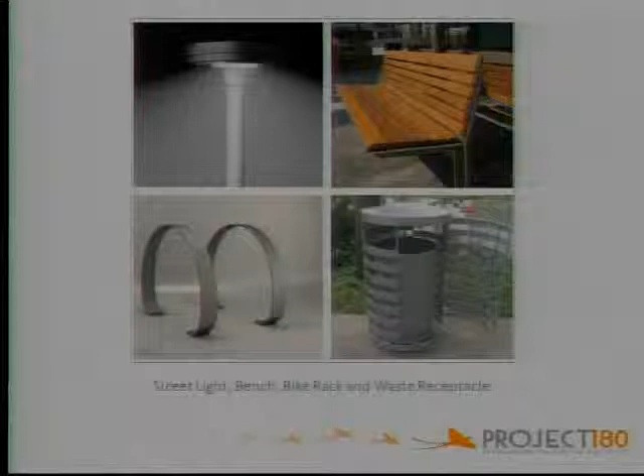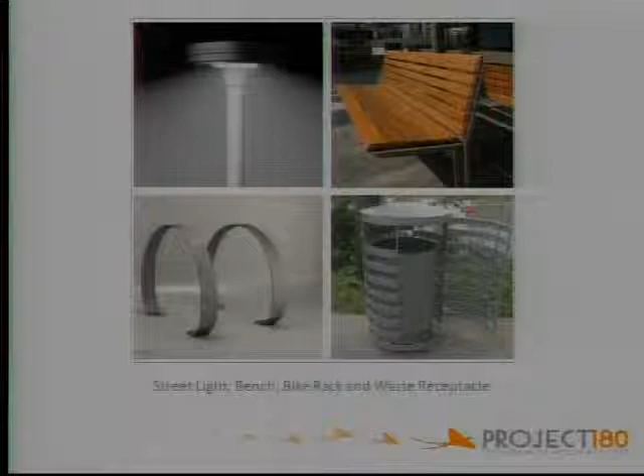This is a slide of some of those improvements, and a lot of these are being located throughout, so I think they're familiar to most of you. In the upper left we have some of the new lighting systems, the new benches, the new bike racks, which are the hooped items you see in the lower left-hand corner, and also the new trash receptacles and cans. Some of those have also been designated for recycling.

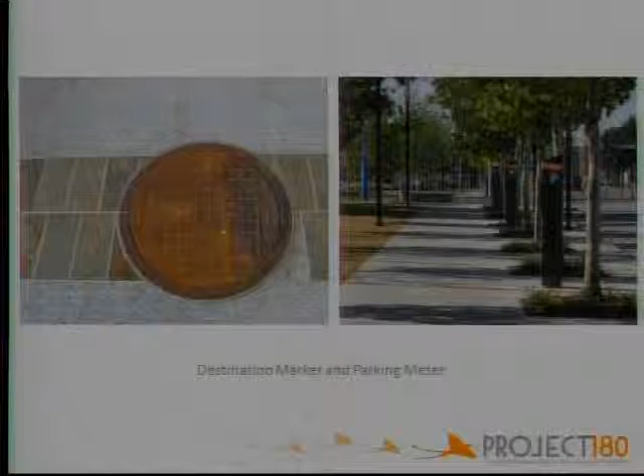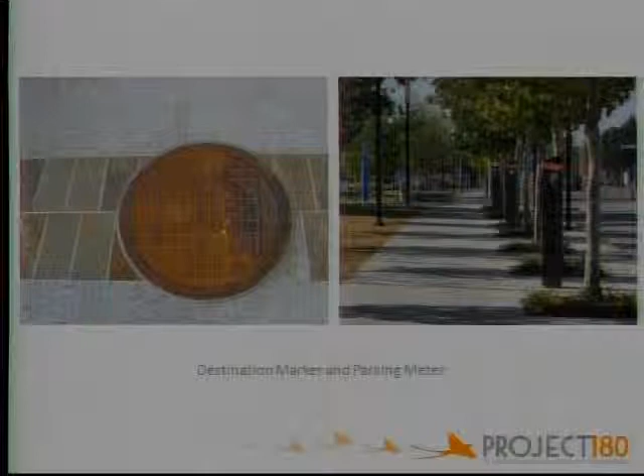Some of the things you're probably just getting ready to see—there's one located on Main Street, just a little bit east of 420 West Main—are the destination markers. This is one of those artistic elements being placed into the concrete, into the sidewalks. These are about the size of a manhole cover. As you look closely, there is a grid of Oklahoma City downtown, and you'll see on this one a silver marker located at a particular location. Around the outside edge is what was relevant in history to that specific site. These are going to be located throughout the downtown area, and a lot of them are now starting to be installed.

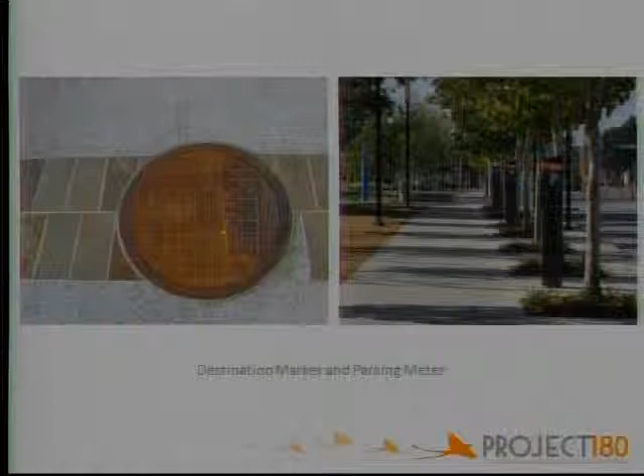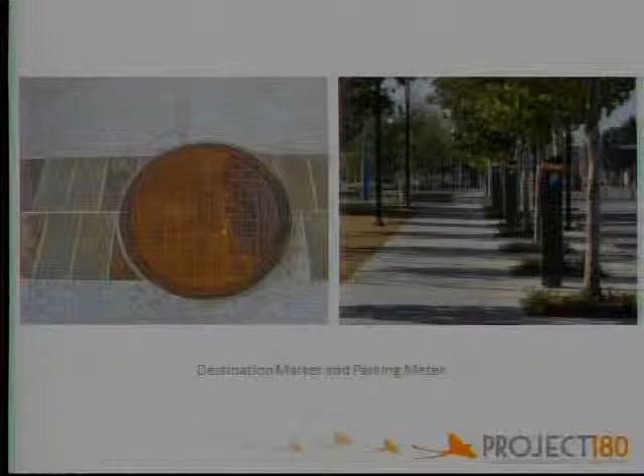Something that's a lot more visible is, of course, the new parking meters. Thanks to Rick Cain and Transit, they're working very quickly as we turn over streetscapes, completing parking and additional parallel parking downtown. You're seeing these new parking meters being installed very quickly.

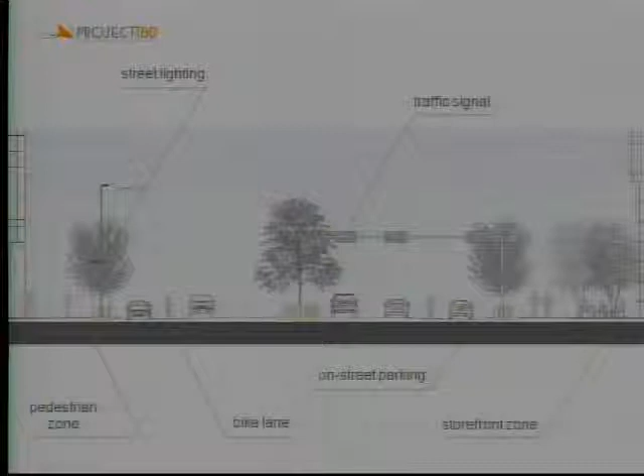This is the typical section we showed a couple of years ago, talking about what a cross-section of a street would look like. As a friendly reminder, we've got these new enhanced pedestrian zones, increasing pedestrian friendliness. We've got the use of bike lanes—some dedicated in the downtown area, others on sharrows, so we'll see a combination of both. We see, of course, the advancement of on-street parking, the trees, and the storefront zones as well.

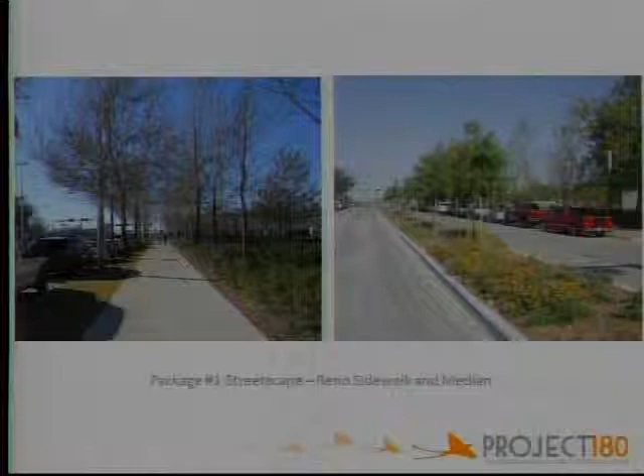This is Package 1 Streetscape. This is Reno, most familiar to all of us, but it's been completed for some time now. Again, we're seeing a lot of activity in this particular area, especially near the Myriad Botanical Gardens.

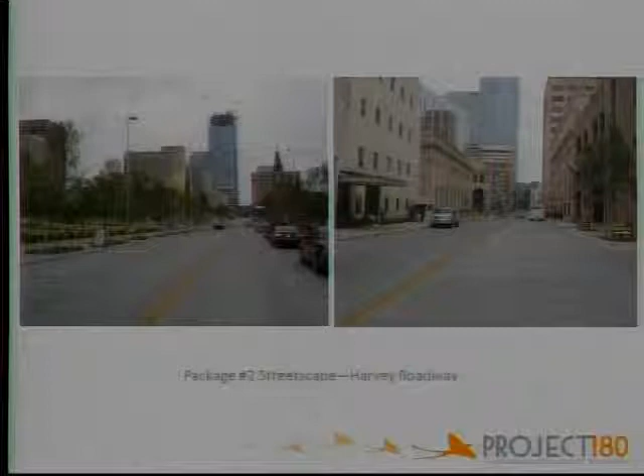This is Streetscape Package 2, this is Harvey. Again, one of our more urban streetscapes, using sharrows for bike and pedestrian access on the sides. We're still able to add a lot of the treed landscapes to the downtown area as well.

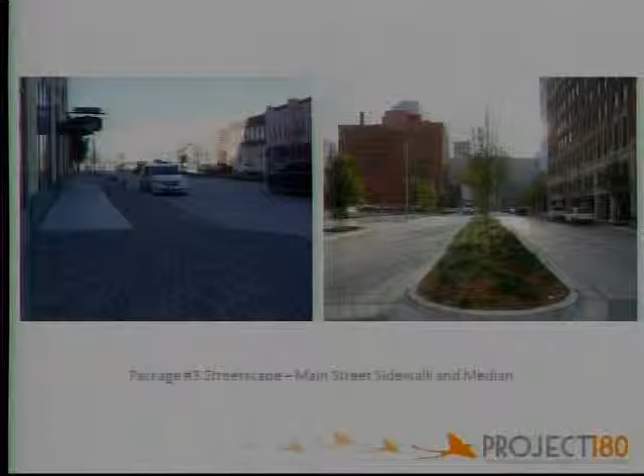We look at Package 3. This is Main Street sidewalk and the median, just south of City Hall. On the left-hand side you'll see the use of a lot of pavers for texture we're creating in the downtown area so it's not all concrete elements. Also the introduction of a lot of medians in the streets to enhance landscaping and green up the space.

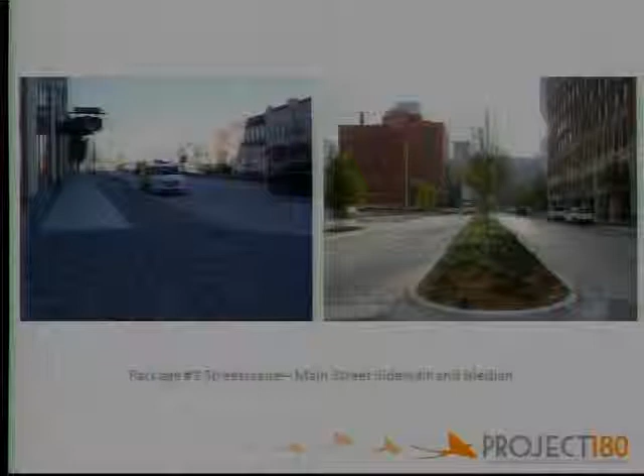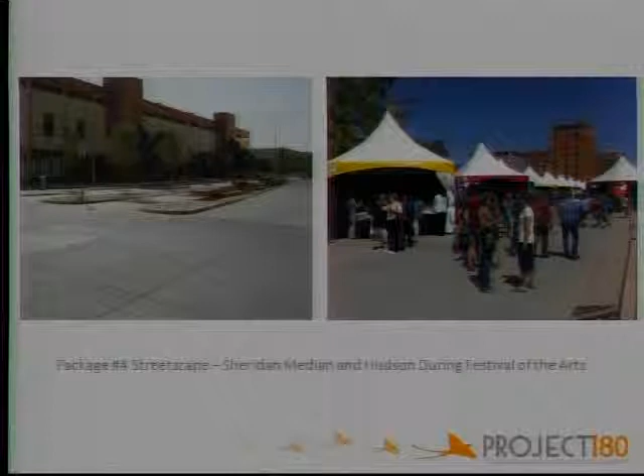As we look at Package 4, this is Sheridan median. We also have the Hudson during the Festival of the Arts. This is the area where we've now completed a two-way conversion all the way to 13th Street. There are still a few stop signs out, but the streets have been painted with new striping. That went active yesterday, and I expect we'll see a lot more use of it in the coming weeks.

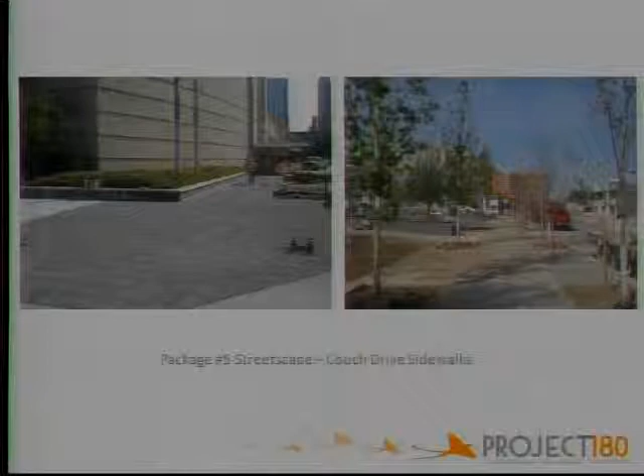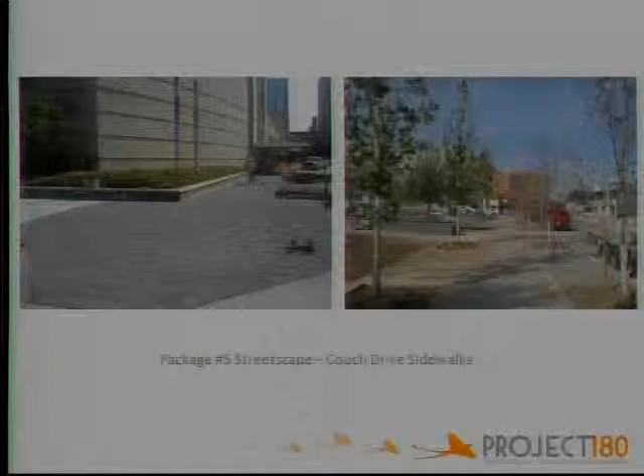Streetscape Package 5 is the work that's currently underway. We expect to complete this in its majority over the next few weeks and into the next month. There are the final panels of concrete being placed on Walker. We have a lot of the amenity zone work wrapping up as well, but this really is the last of the original work that was started just a year or so ago.

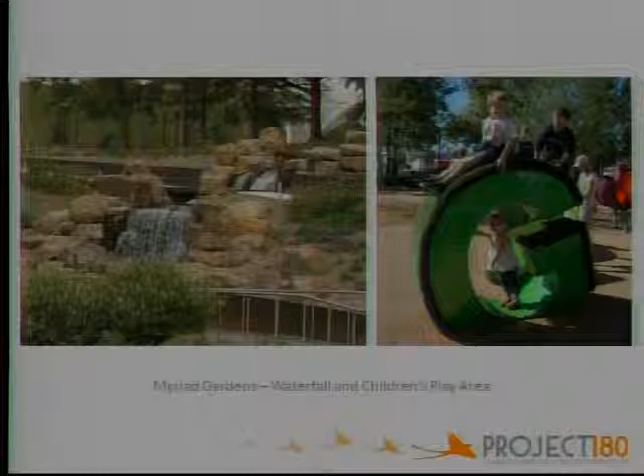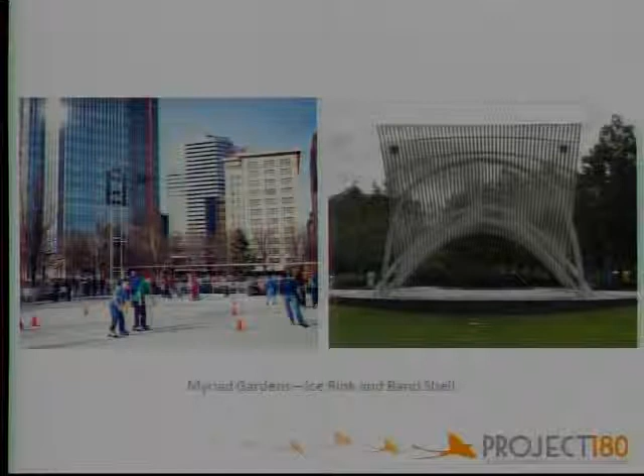The Bicentennial Park was also one of those projects included, and it's nearly complete, now in the final punch list stages. If you were to look at that park today, you'd see it's nearly in its completed form. One of those goals was to focus its central connection between City Hall and the Civic Center. It has the historic grand lawn with the stage, pavilions, a fountain, and a majority of updated landscaping and lighting.

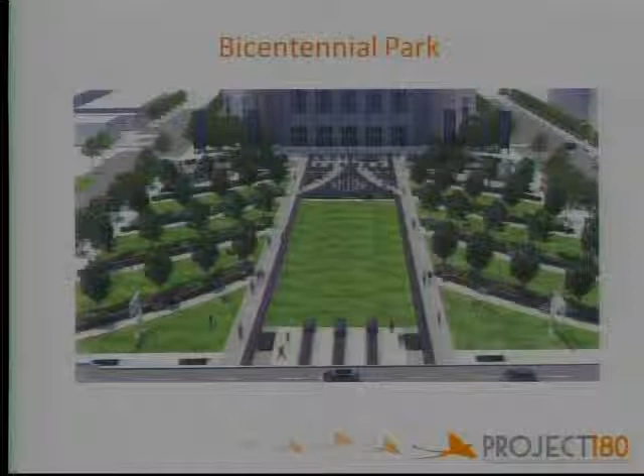This is what that original concept plan looked like about a year ago when we started construction. You'll see the grand lawn in the center, and the sweeping elements that provide for a lot of artistic opportunities -- they treat these sweeping areas as galleries. The Bicentennial Monument has been located in the upper left-hand portion of this drawing, just near the Civic Center. With the new fountain and the stage, there's a tremendous amount of opportunity that's going to be attracted to this new park.

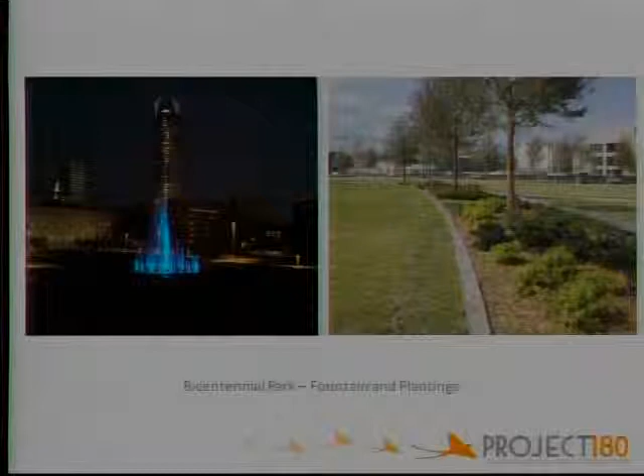On the left is a nighttime photo of that new water feature, up close to the front door of the Civic Center. It is animated to music, and it creates a nice atmosphere. On the right, you can see a lot of the completed landscaping before fall hit and into winter.

Now, we did not complete the City Hall lawn project. You recall that was an add alternate to the Bicentennial project that we chose to look at in the future. So that's something we'll talk about in just a moment, but a lot of work has been done on Project 180.

When we speak about the next phase, we're looking at a series of projects: Streetscape Package 6, Streetscape Package 7, the Pedestrian Plaza, City Hall Lawn, and the McGee Center.

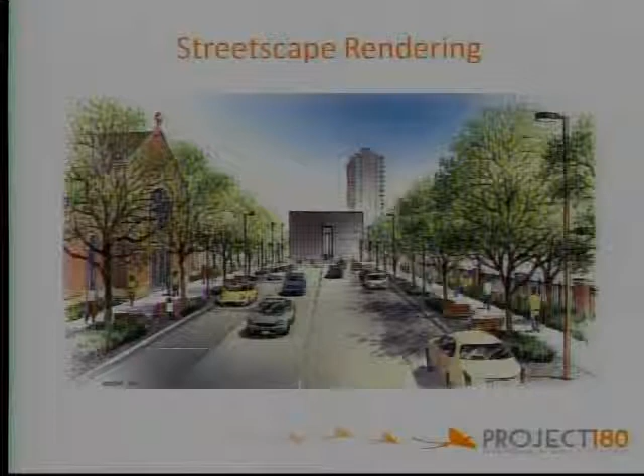There were other renderings we shared with the general public earlier, and this is a rendering of Walker Avenue showing what it will look like when completed. Streetscape 6 is $13 million, and Streetscape 7 is $11.7 million.

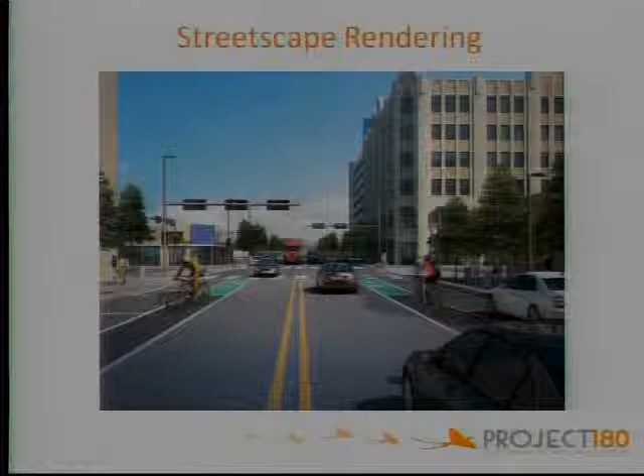This is an area currently owned by the Urban Renewal Authority. We're seeing a lot of activity in this space, and we're recommending a starting budget of $4 million.

That's a total cost that would include all engineering, construction, and contingency. We don't have plans completed on this, so it's hard to describe what that might look like today. But that would come back before this council, as would any design project, so you can have a better understanding of what it might look like.

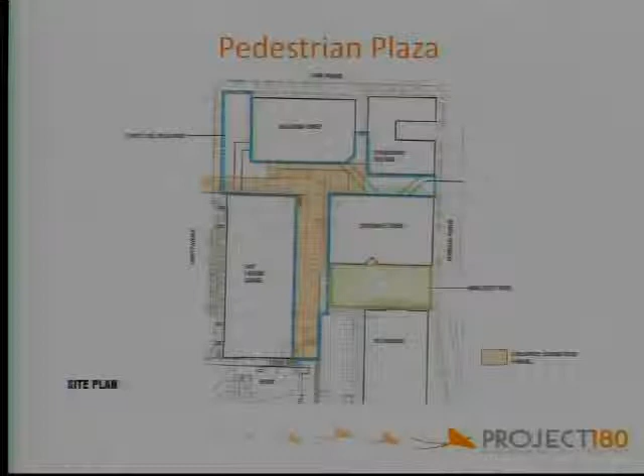As Jim mentioned earlier, making sure we renovate the fountain, upgrade the sidewalks, and encourage ADA accessibility would be our primary focus. I would take this as a starting point, but again, as a design we would bring back to you for further consideration. It would not completely raze the City Hall site. We would use much of what's already here. That project is estimated at approximately $2.2 million.

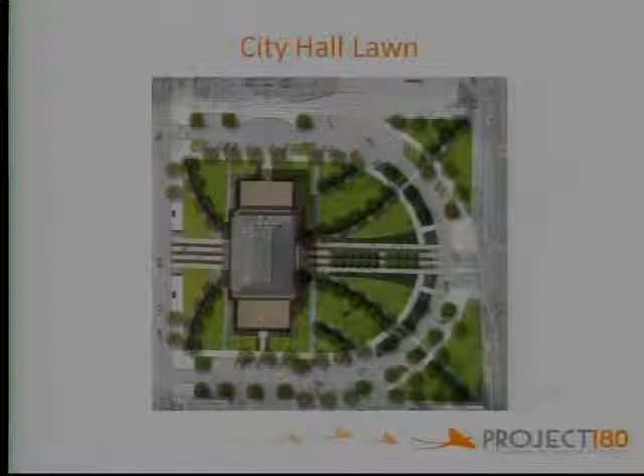As we have done on Project 180 and as we presented last year, one of the things we've included in the budget is project contingency to ensure we can complete the projects as described. We're also including a program contingency. Every once in a while some unforeseen issue comes up that a project can't absorb, and we don't want to take funding away from other projects. So we're proposing that we use the strategy of proceeding with both project-level and program contingencies on all the projects.

Some of the strategy with the yellow, as I mentioned earlier, around E.K. Gaylord — there was a $750,000 grant received there. We really need to proceed with that quickly because there's a time constraint on expending those grant funds.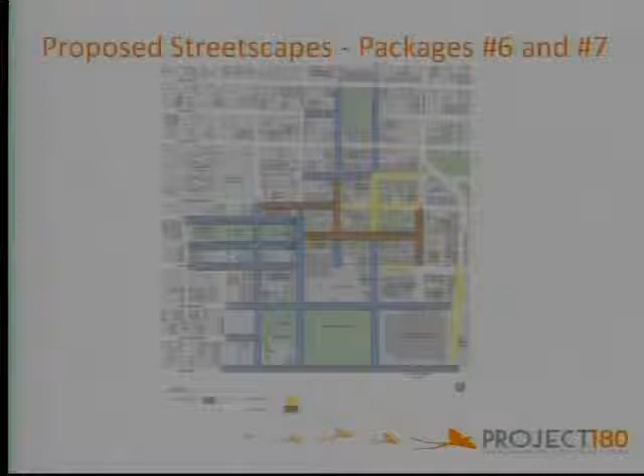In the upper right-hand side, you'll see the Sandridge campus around Kerr Avenue. They're already beginning work on the Kerr and Sandridge sites, and we'd like to align our project with theirs so we can complete the streetscape with the Sandridge improvements. That's some of the reasoning behind why these projects are going in the order suggested. Now, we had a lot of lessons learned on the previous Packages 1 through 5.

One thing we learned is that it's not prudent to allow a contractor to go after all 10 blocks at once. So what we're proposing as part of going forward with Package 6 and Package 7 is that we adopt a 2 to 3 block construction concept, where the contractor would put up concrete barricades. We'd restore some separation between pedestrians and construction to allow ease of access in and out of businesses.

Once a contractor finished a 2 or 3 block section, they would be able to proceed to the next 2 or 3 blocks. We'd expect this to be phased much tighter, with a more stringent schedule — something we'd have to work on very closely with the engineers and contractors moving forward.

The schedule for the projects, although I don't have completion dates — those would need to be determined as we work with engineers and contractors. We're confident on the McGee Center. That's a small project, one we're familiar with, and we could start construction in the spring of '13.

On Streetscape Package 6, our early indications are that we can complete the design in about 6 months and have it out to bid in the summer of '13. I'd anticipate something on the order of 18 to 20 months to complete an individual streetscape package. But we'll have to closely phase those, with the idea that we wouldn't take out parallel streets — we wouldn't take out Walker and Hudson at the same time.

We need to work very closely to make sure that we're minimizing that impact to our downtown patrons. Pedestrian Plaza is one that we think we could move quickly forward and have that ready for bid in the fall of '13. You'll see Streetscape 7 not until winter.